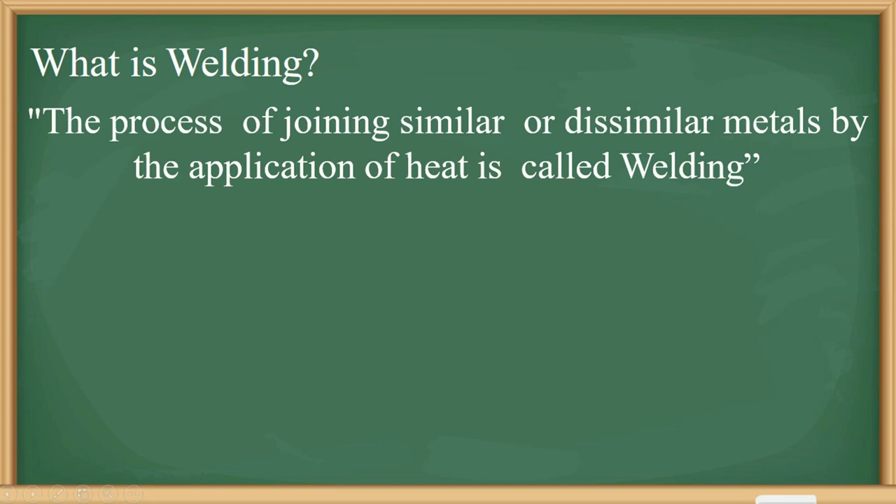We can further refine this definition as a localized coalescence. Coalescence means a joint, a localized coalescence of metal wherein coalescence is produced by heating to suitable temperatures. Normally this temperature range is above the melting temperature range, with or without the application of pressure and with or without the use of filler metal. The filler metal has a melting point approximately the same as the base metal. Filler metal property and chemical composition are similar to the base metal.

So we can define welding as a localized coalescence of metal wherein coalescence is produced by heating to suitable temperatures, with or without the application of pressure and with or without the use of filler metal. The filler metal has a melting point approximately the same as the base metals, and in the majority of cases its chemical composition and mechanical properties are also similar to the base metal. The welded joint has a mechanical strength similar to the parent material.

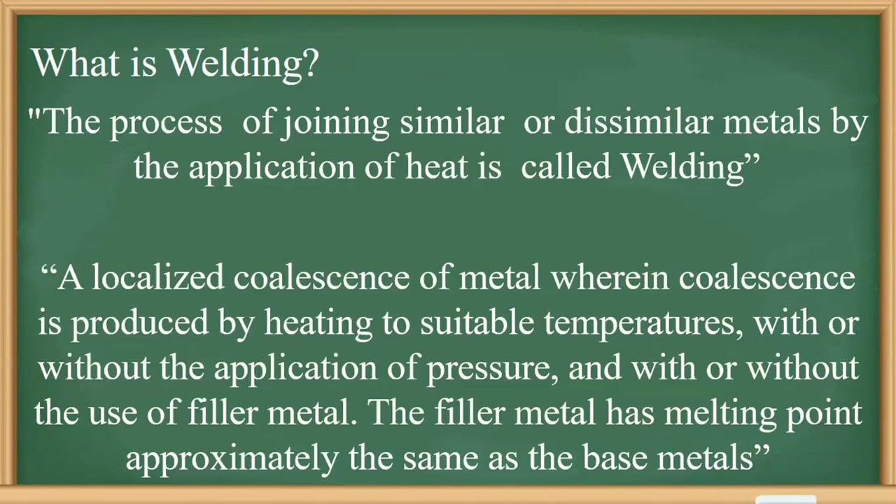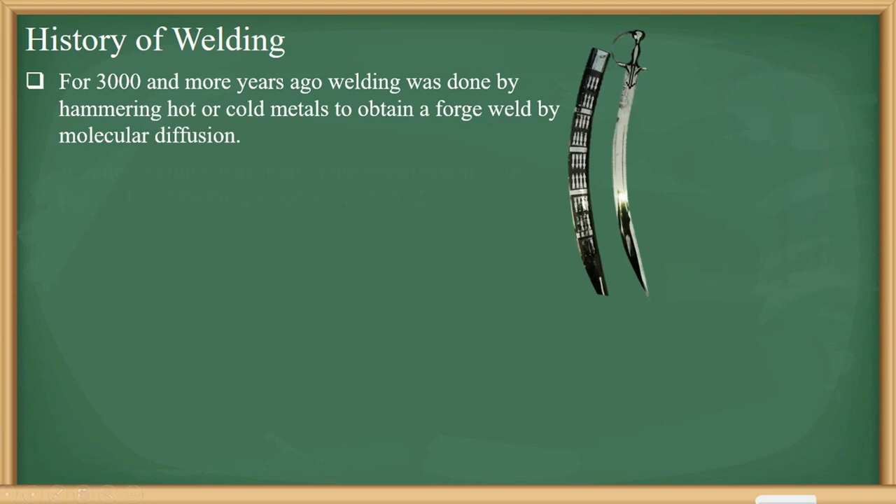Let's see the history of welding. One of the oldest manufacturing processes is forging, a metal forming process, and welding was derived from the forging process. So 3000 and more years ago, welding was done by hammering hot or cold metals to obtain a forge weld by molecular diffusion. During that ancient time, people manufactured swords, coins and other items with the help of the forge welding process. In India, welding was used in the construction of the iron pillar of Delhi, which was erected about 310 AD.

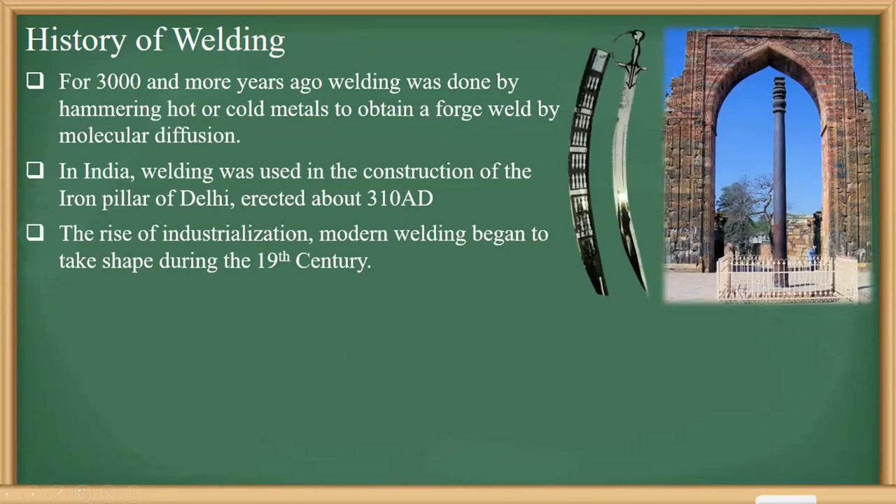With the rise of industrialization, modern welding began to take shape during the early 19th century. Humphrey's cousin, Edmund Davy discovered a colorless gas, acetylene. Acetylene, when combined with oxygen, was able to weld and cut through metals. Nowadays this method is known as oxy-fuel welding, a kind of gas welding process. Gradually, as electricity was invented, other welding techniques were developed during the late 19th century, like resistance welding, thermite welding and alternating current welding. So this is how the welding process evolved.

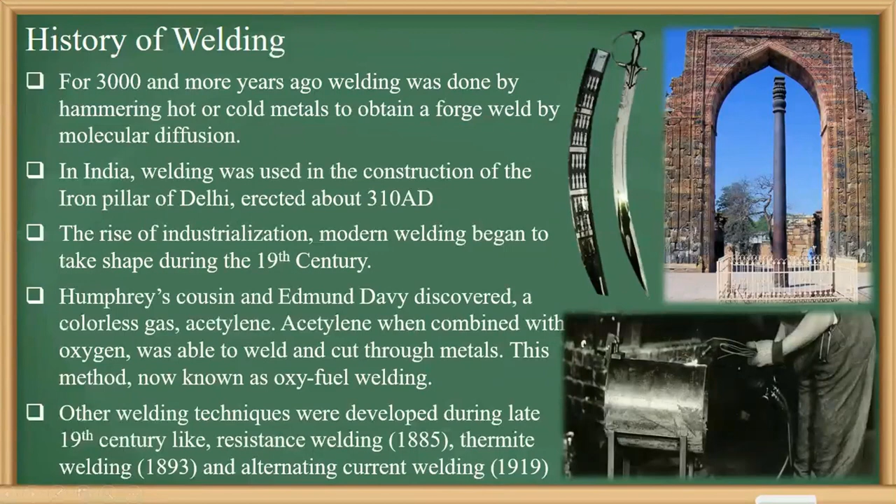Let's see the classification of welding processes. We can classify welding processes mainly into two types: fusion welding process and solid state welding process. In fusion welding, we melt the metal and this melted part joins the two different plates or sheets. Whereas in solid state welding, we do not melt the metal, but at semi-solidus temperature, the metals diffuse into each other and establish the coalescence.

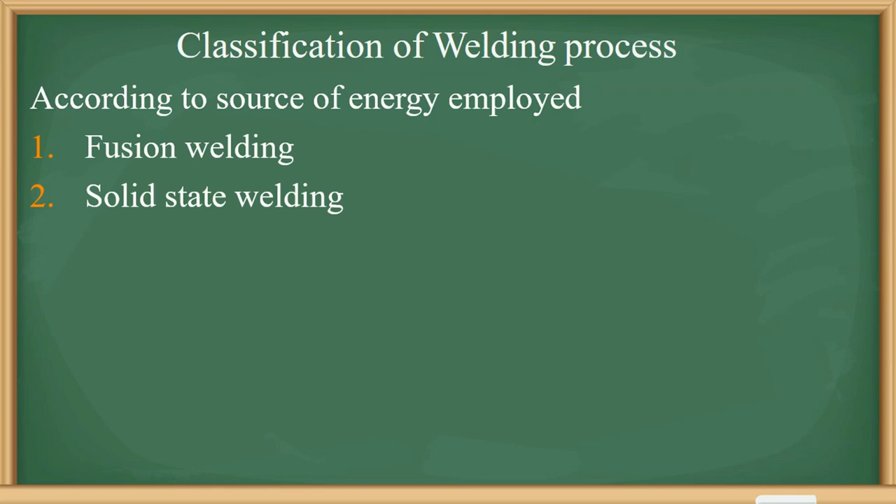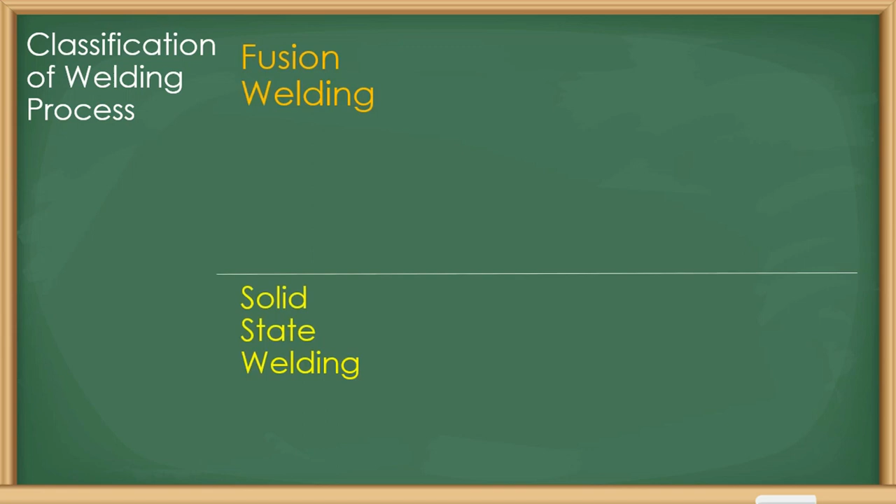Let's see the detailed classification. We can classify the welding process as fusion welding process and solid state welding process. Fusion welding process is further classified as gas welding process, arc welding process, thermite welding process and newer welding techniques, also known as high energy rate welding techniques.

Gas welding techniques are further classified, on the basis of gases used, as oxyacetylene welding, air acetylene welding and oxyhydrogen welding. Arc welding is further classified as carbon arc welding, manual metal arc welding, tungsten inert gas welding, referred to as TIG welding, also known as the gas tungsten arc welding process, metal inert gas welding process, and plasma arc welding process. Other arc welding processes are submerged arc welding process and electroslag welding process.

Thermite welding is especially used for joining rail lines. It is a special type of welding technique. Newer welding techniques are further classified as electron beam welding process and laser beam welding process. Now let's see solid state welding techniques. They are classified as resistance welding process, friction welding process, ultrasonic welding process, diffusion welding process, explosive welding process and forge welding process.

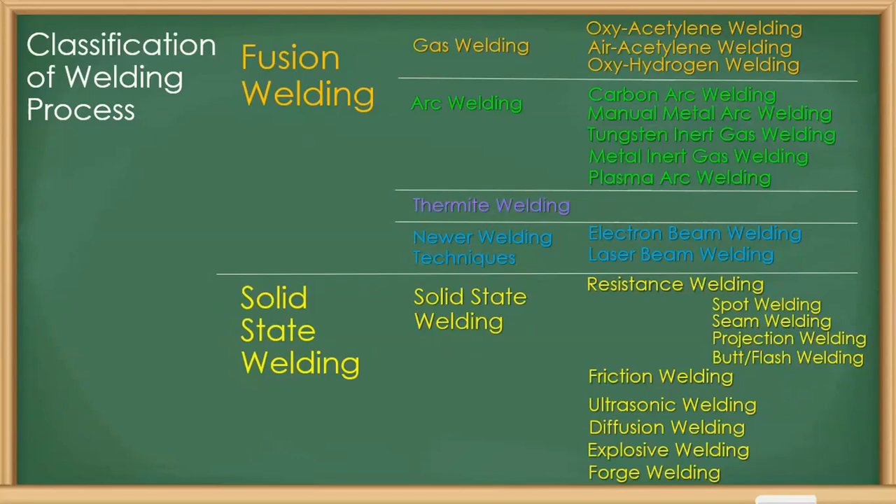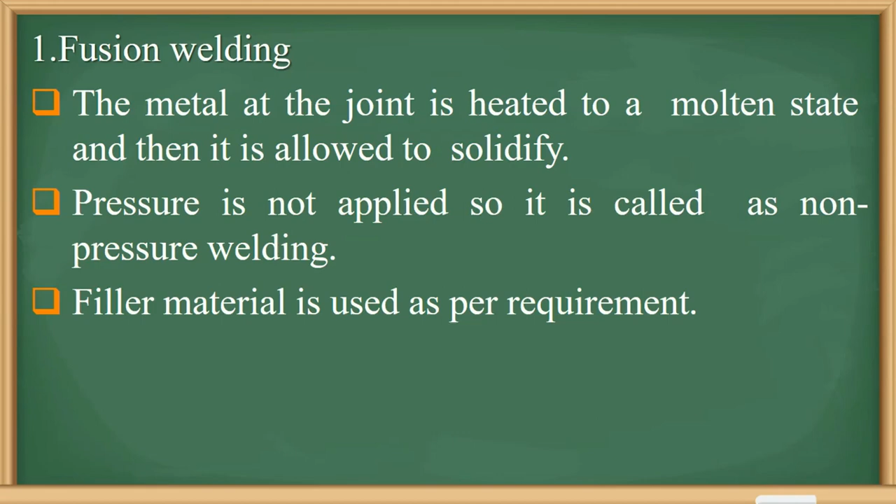Now let's see the fusion welding process. In fusion welding, the metal at the joint is heated to a molten state and then allowed to solidify. Pressure is not applied, so it is also called non-pressure welding. When we are establishing the joint between two plates, to fill the cavity between them we use filler material. It imparts strength. Sometimes for a small thickness we do not use filler material. According to the requirement of the workpiece and its geometry we use filler material.

In solid state welding, the metal parts are heated to a plastic state and pressed together to make a joint. Hence it is known as a pressure welding process, plastic welding process or solid state welding process. Here we do not use any kind of filler material.

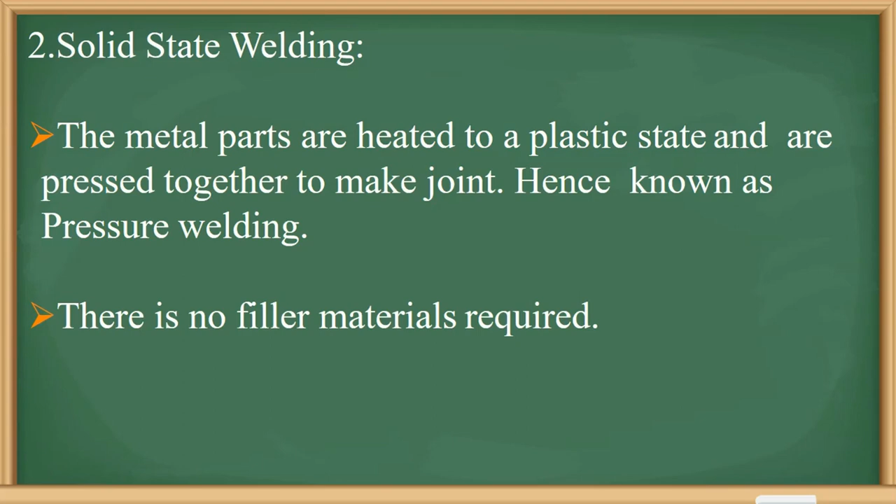We can further classify the welding process on the basis of the use of filler material as autogenous welding process, homogeneous welding process and heterogeneous welding process. Autogenous welding process means filler metal is not used. As shown in the diagram, in resistance welding we do not use any kind of filler metal. In solid state welding we do not use filler material. It is known as the autogenous welding process.

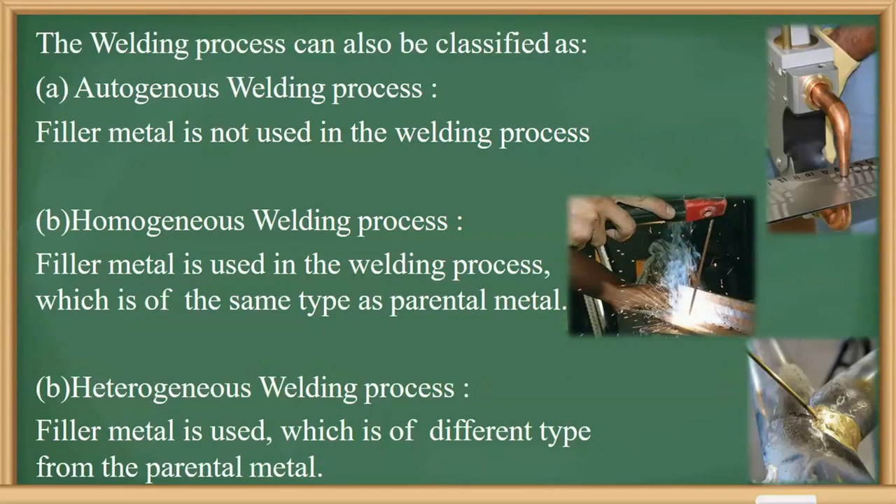In the homogeneous welding process we use filler material the same as the parent material, meaning the same as the base material which we are joining. And the heterogeneous welding process means the filler metal is different from the parent materials, like in brazing and soldering, where we use a different filler material compared to the parent materials. So in this way we can classify the welding process. There are many different types of welding techniques available.